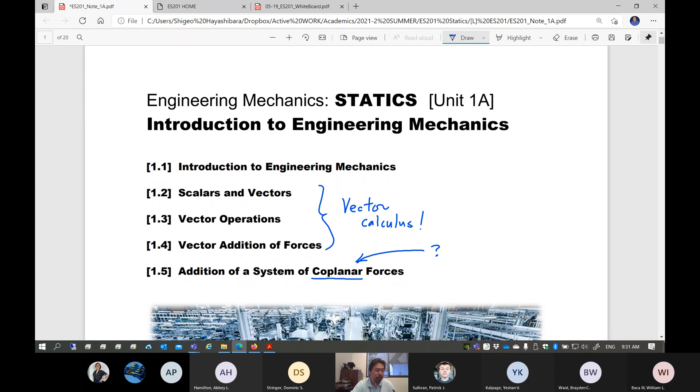Does anybody know the meaning of coplanar? Please speak up. Wrong answers welcome. What is it, coplanar? Is it a multiple plane?

Coplanar means on the same plane. On the same plane. That means coplanar is 2D. So if you say multiple planes, it's going to be 3D. So if you look at 3D, you have to do a very good sketch, of course.

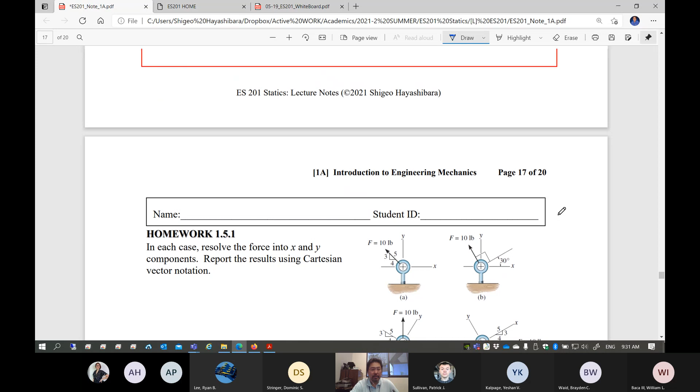Coplanar is... wait a minute, am I right? I don't know, let's find out. Let me just take a sneak preview. What is 1.5? Yeah, coplanar is 2D, looks like, yeah, everything's 2D. See that? Yeah, okay, so everything is in the xy plane. Ah, all right, good, good, good.

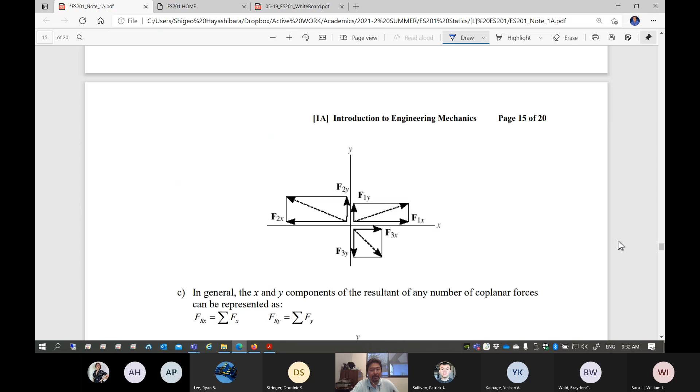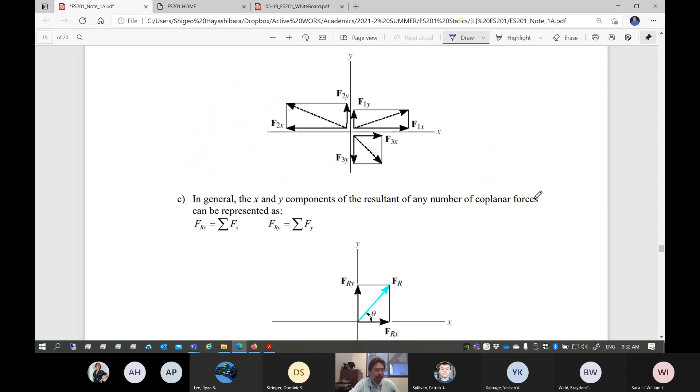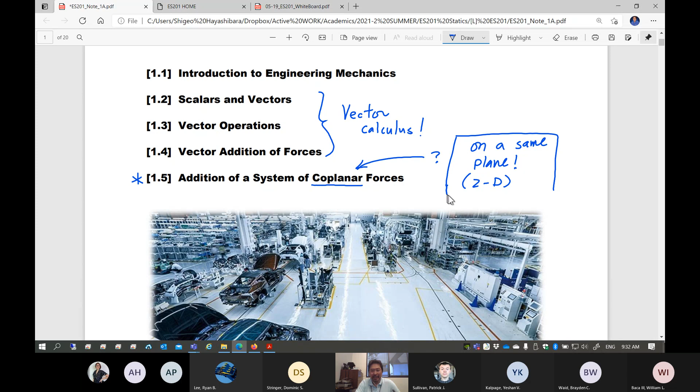So we are going to begin with two-dimensional vector subtraction, addition, combining two vectors, three vectors, finding out the resultant, or resolving one vector into two directional components, stuff like that. We're going to do that to begin with in 2D, and then we are going to extend it to 3D. So I was right, good. I appreciate your comment, wrong comments also appreciated.

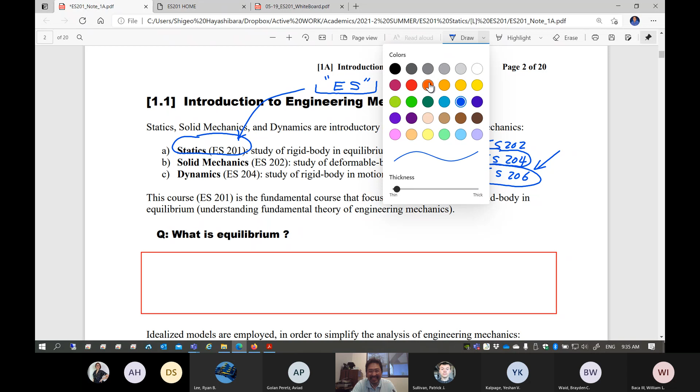This is solid mechanics. This is a very basic class for structures. Who's teaching structures? Dr. L, right? Yeah, I'm not gonna name. But anyways, those are tough classes.

In other words, how much time you are willing to spend for those basic classes will determine your future fate. People say, hey, those are gauntlets, you know, tough classes. No. Tough things come later. If you take care of those classes right, those tough classes will become all of a sudden your fun classes.

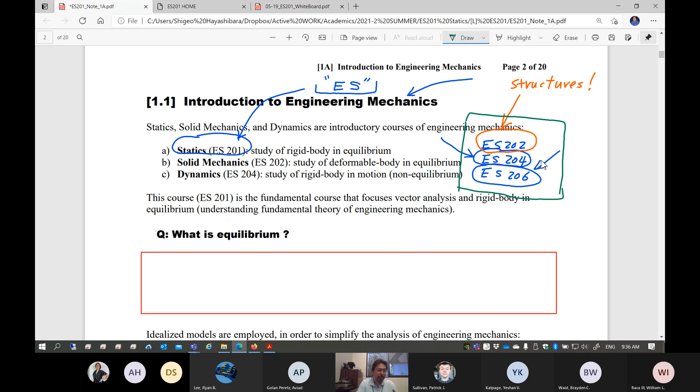You fully enjoy being an engineering major. Graduate, get a prestigious job, enjoy your life. I hope that's what you want. Okay, so don't listen to what the fake news said.

Well, fake news, I shouldn't say fake news, but the fake information that the students spread over. Oh, you know, don't take Dr. W's class, well, it's a nightmare class, take this teacher instead, he's easier - kind of information. That's BS, okay? If you say, well, Dr. W is so difficult, tough, and a nightmare class, that is a very good indication that you'll be educated very, very well.

Anyways, so this course ES201 is the beginning of those. Welcome to engineering core curriculum. But you have to go through it to get to your major classes, AEs. You can never get to that level unless you go through those engineering core majors, engineering science, engineering mechanics.

Actually, engineering science - ES is engineering science. What is engineering science? What is the difference between that and engineering mechanics? So this science terminology comes into play because this is physics of why this happens. So it depends heavily on physics, in other words, theoretical - you have to understand theory first before you understand mechanics.

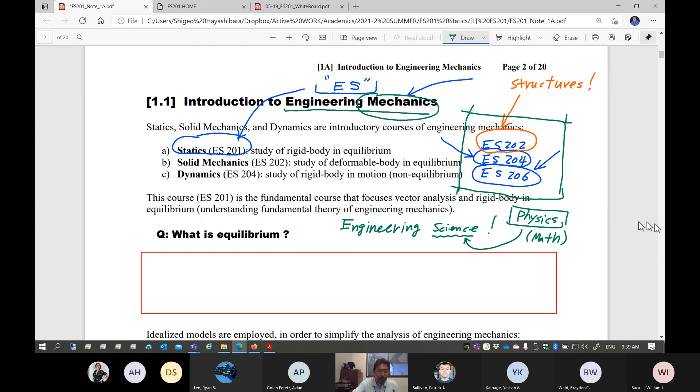So just don't think, oh, this is a class I can kind of sit back, relax, have a coffee and not pay attention, and I can go through it - no, you're going to spend 4 years with serious hard working. Try to understand the concept.

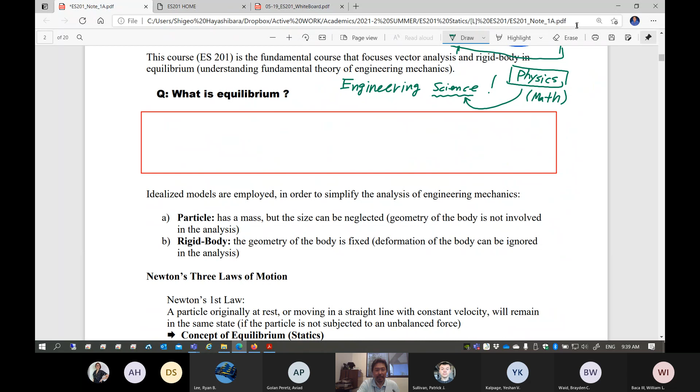Okay, so question here. Number one: statics is a fundamental course, focuses on vector analysis and rigid body in equilibrium - two very important terms. Let me underline. Vector analysis is fine, but rigid body, equilibrium - two important things. Rigid body, of course, you know that.

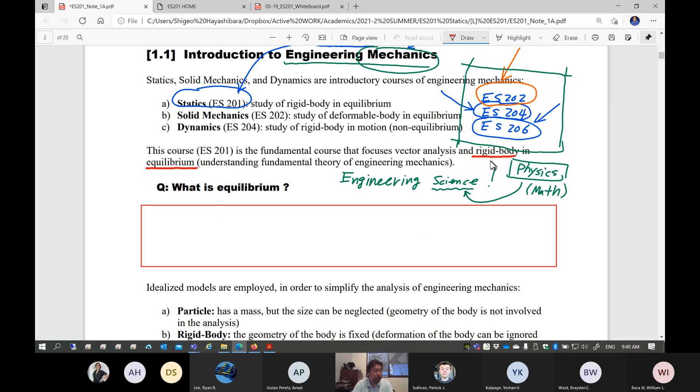Rigid body is a very hypothetical thing. It doesn't deform at all. No matter how high you apply the external force, this thing doesn't deform. That's rigid body - idealize the concept. We are going to deal only with rigid body in statics, okay? And equilibrium - what is equilibrium?

No acceleration is 70% correct, 30% wrong. In order to have acceleration, you have to have a motion. Equilibrium is... constant speed could also sometimes be considered equilibrium. So you're right, but in statics, as the name implies in this particular class, basically means no motion. If you have motion with a constant speed, if you choose a proper coordinate frame, you can consider that as an equilibrium too. But let's just for a moment say no motion.

What causes no motion? Suppose you're pushing something and moving it around - I have a mouse moving around, it's moving, I'm applying the force. What makes it no motion? When you have no force? No force is one thing, but suppose you apply one force - can you still, with one or more forces, create the no motion condition? Yes, if the net forces cancel, it's in equilibrium.

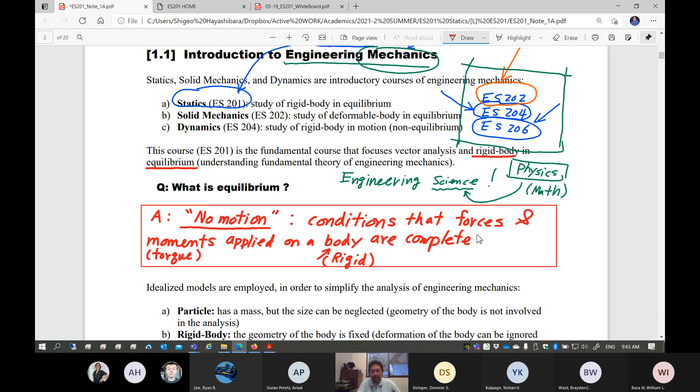Do you know moments? Sometimes called torque. Moments applied on a body - body is a rigid body. Condition that forces and moments applied on a body are completely balanced. As a result, there is no motion. This is called equilibrium. So statics in this class is all about a rigid body in equilibrium.

Okay, so that's the baseline concept. Now you're going to take solid mechanics after this - what is that class all about? I don't know who's teaching it, but you're going to take solid mechanics. What kind of class is that after this class? Ryan, go ahead - the study of deformable bodies. So deformable body, strict, yeah. Oh, so solid mechanics is basically about the same as statics. The only difference is the body is now deformable.

If you're dealing with a deformable body, what happens is when you apply the force, the body deforms. As a result, you're going to develop internal strain, and as a result, you're going to have internal stress also. You're going to deal with that. That's solid mechanics, but the starting point is statics.

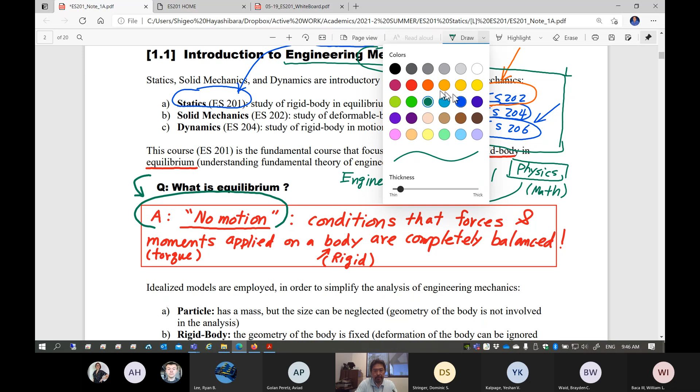Okay, dynamics - what is that all about? With motion? With motion, yes. So in dynamics, you are not going to talk about the deformation of a body - still a rigid body. However, if the rigid body is in motion, suppose you apply a force and the body starts moving, it could accelerate in a certain direction. What is the behavior of that? So those three are essentially the same category of engineering science courses - we just constrain one condition and then simplify and analyze. So as you go through those classes, you need to systematically understand what aspect of engineering science we are dealing with. Those are not independent classes.

Those are closely related. Now, here's something nobody will tell you to do, but I will tell you: after you take all three classes, you have to integrate, summarize, and have a big picture. In other words, small tiny pieces of the puzzle - you have to put them together yourself. People actually do that without consciously thinking about it, but that's what you need to be doing. Students sometimes struggle to do that. In upper division classes, sometimes students just cannot perform well in any engineering class they take - those are the students who actually cannot piece together those things into a big picture.

Statics comes in, dynamics comes in, and then thermodynamics comes. Those are not independent classes, they're closely tied together. You have to piece it together yourself. Nobody actually tells you that, but I have to tell you this is important. Oftentimes students don't realize it. After completing all of those core engineering science classes, you have to piece it together yourself. You can possibly create one big file folder with all of those classes, homeworks, and notes combined, and tab it so you can pick up any information you need for upper division classes. Piece it together, because this is systematically an engineering science class. You need that for your major classes. Without that foundation, it's a joke when you take AE classes in upper division.

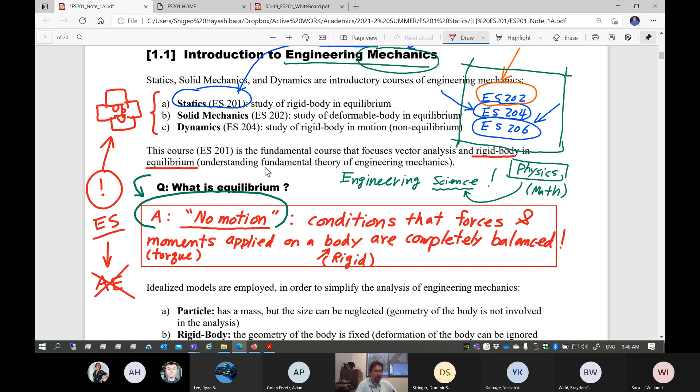Now in this statics class, we are going to use idealized models. We have to idealize because we're dealing with a rigid body. The very first step of idealization is to consider a particle. What is a particle? Nobody knows - it's idealized as a particle. This has mass, but the size can be completely ignored. It's small enough that I don't care about the size. The geometry of the body is not involved. So first of all, idealize the concept.

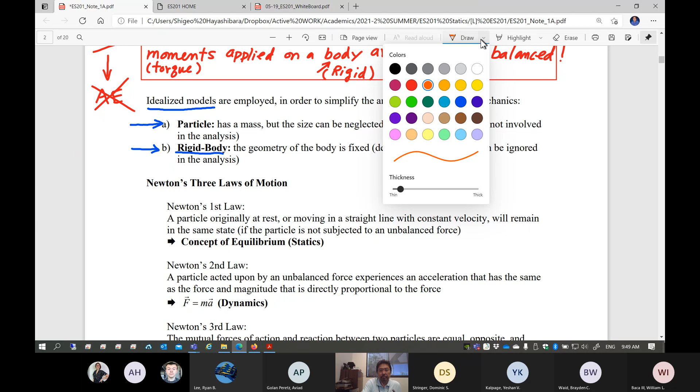Gradually we are going to move into rigid body, which is some actual body - it could be a car body, an airplane body, or whatever - but we still consider it a rigid body that doesn't deform at all. So we deal with two different kinds of idealized things. Suppose you're talking about a particle - this is a very small, tiny thing, a particle.

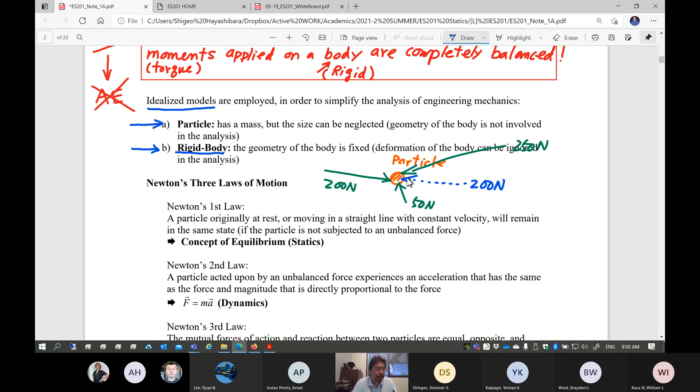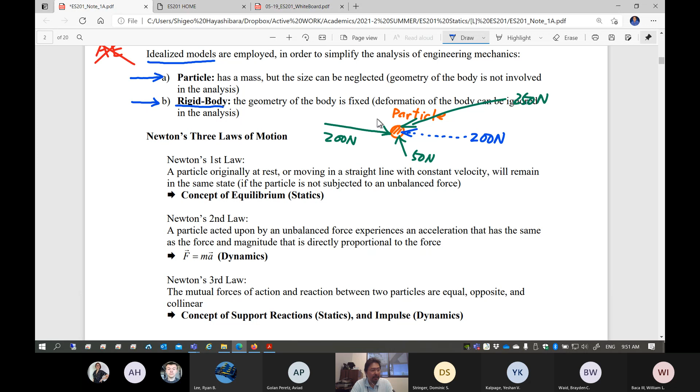Let's apply forces. I'm going to apply 200 Newtons of force here, and 50 Newtons of force here, and 250 Newtons, I don't know. Hopefully those two combined together equal and opposite to 200 Newtons. If so, it's equilibrium. I have no idea what the angle is, but this 250 combined is equivalent to 200 Newtons, equal and opposite to the original 200 Newtons. If so, this particle is in equilibrium because there's no motion involved. So the question becomes: what is the angle here? What is the angle there? That is going to be a starting problem for the statics class.

Before we begin, let's talk about the very famous Newton's three laws of motion. This is Newton's first law: a particle originally at rest, or moving in a straight line with constant velocity, will remain in the same state if the particle is not subjected to an unbalanced force. What does that mean? This is equilibrium.

Newton's second law: a particle acted upon by an unbalanced force experiences an acceleration that has the same direction as the force, and magnitude directly proportional to the force. F equals ma. By the way, this is the governing equation of ES204 dynamics. This is the concept of this class, ES201 statics.

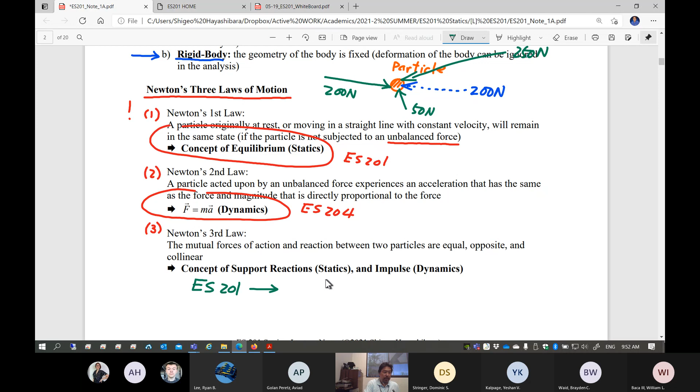Newton's third law of motion: the mutual forces of action and reaction between two particles are equal, opposite, and collinear. This is actually very important in this class, ES201. We are going to later revisit this concept. This is basically the baseline concept of support reactions.

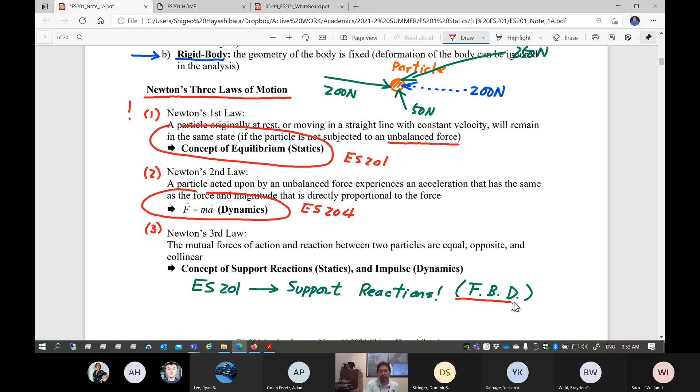Free body diagram is a very important item in statics and also solid mechanics. Almost every problem you solve requires a free body diagram. Let's say, for example, this is a bar or something. You are going to support it - this is a pin support, sometimes called that - and the other side, you put a roller on the ground. Let's analyze this.

What is the first step you need to do? You have to draw a free body diagram. We are going to cover that later, don't worry too much about it. You are going to basically disassemble everything: remove the pin, remove the roller, and then replace them with equivalent support reaction forces.

So those are the two support reaction forces for the pin. This is a single support reaction force replacing this roller. This is the free body diagram. After you sketch out the free body diagram, you apply equations to try to solve it. So if you apply a 500-pound force here, what is the force reacted here?

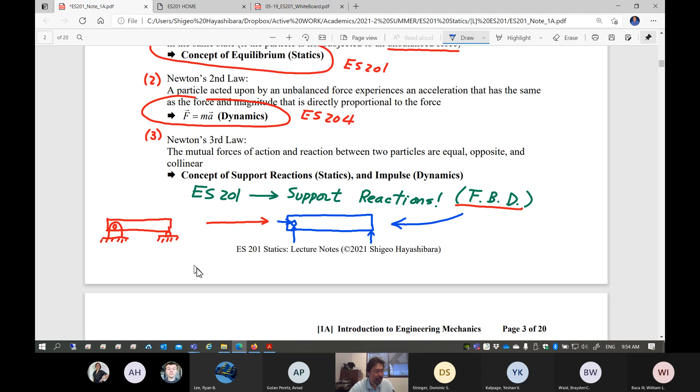Stuff like that, okay. Any questions so far? Please stop me anytime if you have any question.

All right, next page: Newton's law of gravitational attraction. This is based on the second law, because force is essentially created due to mass times acceleration. Now this acceleration becomes gravity. So this is entirely based on Newton's second law of motion. This actually provides the important information of how much gravitational acceleration you're going to develop on the surface of a planet.

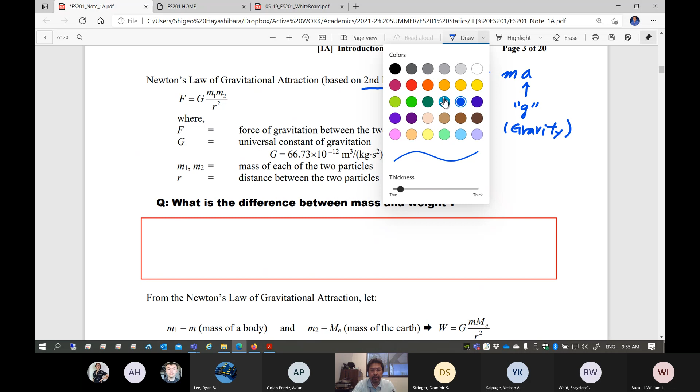So, by the way, do you guys know the gravitational acceleration at standard sea level on Earth? G, anybody? Is it about 9.1 meters per second squared? 9.81, sorry. 9.81, that's right. What's the unit? Meters per second squared. That's correct.

Anybody know the British unit, the U.S. customary unit? People understand you love SI units, but this is the United States. What is the U.S. customary unit? I think it's about 32.2 feet per second squared. Okay, feet per second squared. So this is the standard sea level gravitational acceleration on Earth: this is SI unit, this is US customary unit, British engineering.

So it looks like you have two different unit systems, huh? Yeah, too bad. I'm originally from Japan, you know. After I came to the United States, it was my first time looking at what a pound is. I'd never heard of it. Why 12 inches and not one foot? Stuff like that. But we're going to cover that.

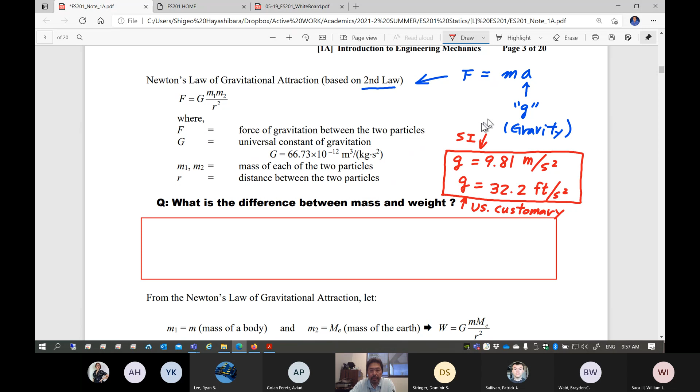This is a force of gravitation between two particles. Suppose you're talking about the weight of something, W, this is a weight. So let's pick up this mouse. This mouse has a weight, I don't know how many pounds, but how can you determine such a thing? How much mass do you have for this mouse? Multiply by G, gravity. This equation comes entirely from here. So suppose you have two things: one is weight, one is mass. Are those the same thing or different things?

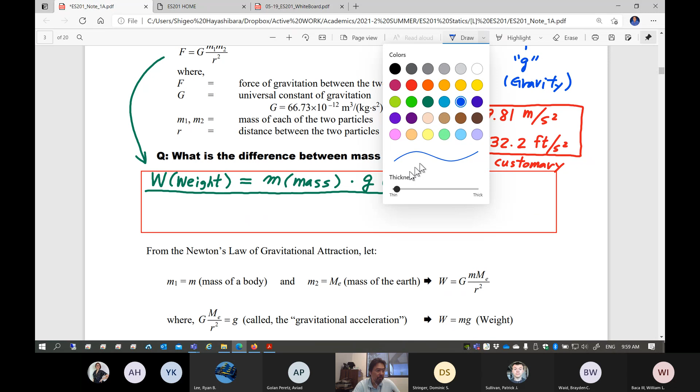Of course, it seems different. What is the difference, okay? This is actually quite an important discussion. This is a joke, so please don't do this, but suppose you go shopping today, I don't know where, could be Walmart, could be somewhere else. Go there and buy something, let's say you buy a bag of apples, and the bag says 5 pounds.

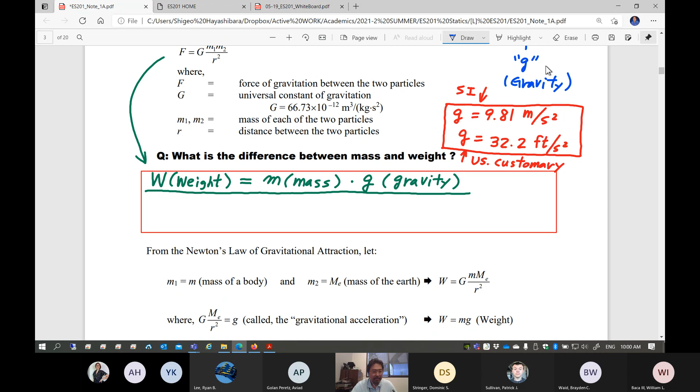Okay, then bring that 5-pound apple bag, go straight to the customer service, ask this question: is this 5-pound mass, or is this 5 pounds of force? This is a joke, don't do that. What's your response? Suppose you have a part-time job at customer service, and a Japanese professor from Embry-Riddle shows up and asks, hey, is this a 5-pound mass or 5-pound force? I want to answer, how do you respond?

Well, mass can't be a force, right? So if you say 5 pounds of force, that doesn't make sense to me, because pounds is... well, actually, no, that does kind of make sense because that's a weight. Good, so you're saying this is 5-pound mass, huh? If I say that's 5-pound mass, it doesn't make sense at all. Okay, so this is 5-pound force, huh? If I say it, then, right, you're a customer service rep and you say yep. Then I say, fine, I'm going to pay the money for this based on your statement that this is 5-pound force, is that correct? And you say yep. Go ahead, you're crazy, then you're right. So is 5-pound mass different from 5-pound force?

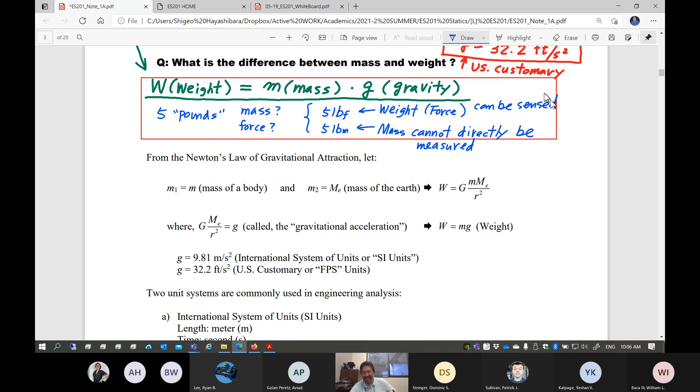That happens to be 5 pounds of force. Under the Earth's gravity, this apple has 5 pounds of mass. So you actually backtrack and detect how much mass you have under the influence of standard gravity. If you go to the moon and create a Walmart there, you have to redesign everything for that scale.

Or actually, you always have to deal with, okay, how much pound mass do you have here? Is this pound mass or pound force you're talking about? Because those are not the same thing on the moon. Why is that? Because the moon's gravity is not this value. So the same 5-pound mass on the moon is not going to create 5-pound force of weight.

How much do you think it's going to create? Probably less, because you're multiplying by a smaller gravity. That's right. Gravity of the moon is 1/6 of Earth's.

So suppose if you have a 6-pound mass huge apple. Drop it on the scale on the moon. It only shows 1 pound force on the moon. If you bring it back to Earth, it shows 6-pound force because it's 6-pound mass. Dropped on the scale, 6-pound force. But on the moon, it only shows 1 pound force.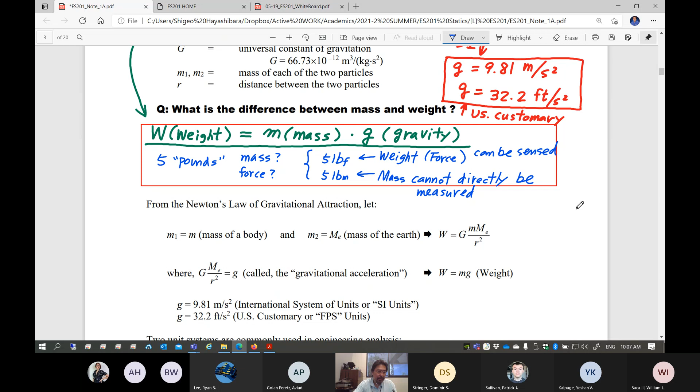Okay, so I hope you get the basic idea for that. Weight and mass are different, okay? So, that's right. From Newton's law of gravitational attraction, you're going to apply two different masses. One is the mass of a body, the other one is mass of the Earth. Apply this equation, and it's going to create the equation of weight on Earth.

Equation of weight: weight is equal to mass times gravity. Gravity in standard unit on Earth is given at standard sea level. I just keep saying sea level. What do you mean by that? If you go to higher altitude, this is going to change. So in a space shuttle, at really high altitude, it doesn't have this much gravity.

So how many people here are actually space track, astro track? Raise your hand. So, too bad, you have to deal with this all the time, okay? So mass is not equal to weight if you go to space because the gravity is not this value.

So if you go to Walmart and do such a trick, oh, okay, this is 5-pound mass or 5-pound force, which one is it? And then people say, well, I don't care, you can take either way, because this is on Earth at standard sea level, the values are the same. 5-pound mass of an apple creates 5-pound force of weight. So you can either take pound mass or pound force. But if you do such a thing when you design a spacecraft, what happens? You can tell, right?

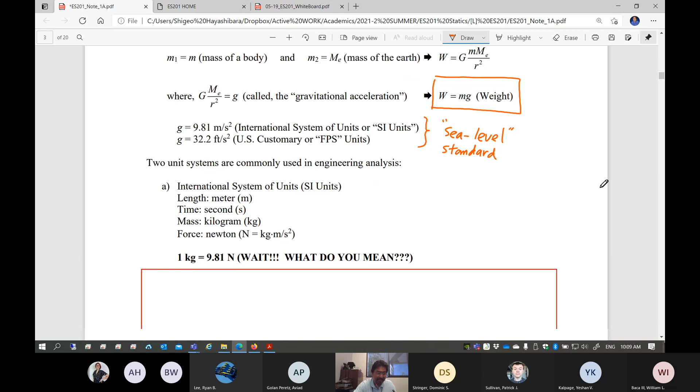Okay, so let's be careful, especially if you call yourself astro track. Differentiate pound mass and pound force.

Oh, that's why I hate US customary units. I love SI units. Do you say that? Does anybody say, oh, I love US customary unit, it's better than SI, or SI is so good? If you love SI, raise your hand. Two, three people, 4, 5, 6 people, seven people, 7 out of 9 people love SI. Okay, actually 8.

So yeah, I can hear your feeling. There are 2 unit systems we have to cover here: SI and then US customary. This is something called British Engineering Unit, BE. This is like System International, something. This is a French word, okay, International System of Units, SI. Let's begin with it, okay.

So we are going to actually talk about three base units. I'm going to use the term dimension. If you come to think about anything you use in engineering, what kind of things we're going to use to quantify, such as velocity, acceleration, weight, force, lots of things, those essentially come down to 3 base dimensions: mass, length, and time. So those are the three base dimensions.

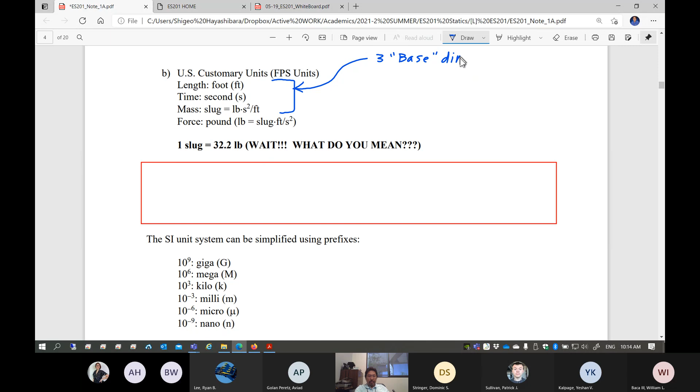Three base dimensions: mass and length and time. Let's for a moment just forget about the temperature. So suppose if you choose a standard dimension of unit of mass—actually, let's just do that later. Let's just choose an easy one to begin with: let's just choose the standard unit you appoint for US customary units for time.

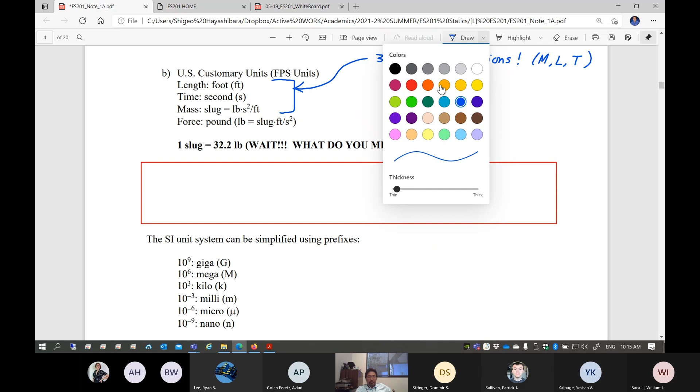What is the standard unit of time? Standard—it's a second. People don't use minutes or hours or 1 week as a standard unit.

In other words, standard in terms of: I'm going to analyze an engineering problem. The problem is given in terms of minutes, let's say shaft rotation, revolution per minute. Can I pick up a value associated with that unit, 60 RPM? Can I just pick up that value and punch it into my calculator together with other values? Suppose if you try to determine how much torque do I have—the problem is given, okay, shaft diameter is 2 feet, I don't know, and rotation is 60 RPM. How much torque do you need to have, or how much torque do you develop in, I don't know, pound foot? So all of those numbers are associated with those different units.

What is the standard unit you want to have for that computation? It's a second. So if the RPM is given, what do you need to be doing? RPM is not the standard unit. You have to convert it to revolution per second, not the minute. So the original number could be 60, but it's going to be a different number. That different number, you need to get first, then use that number in your calculator. Do you understand what I'm talking about? That's the standard unit—an important concept in your computation.

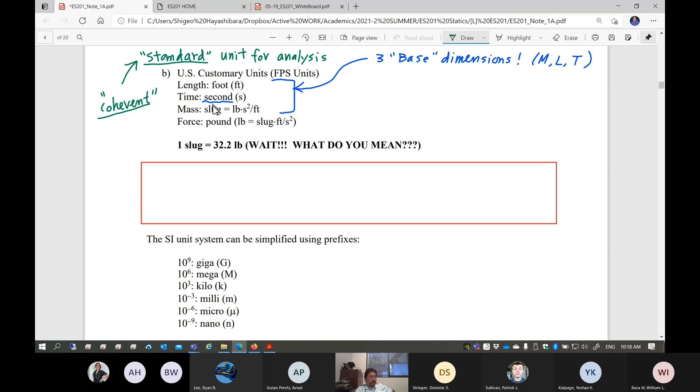coherent unit. Coherent means if you stick with seconds for the time standard unit, it sticks with other standard units nicely so you can create a product such as force. Force is made up, like I said, force unit as a standard, 1 pound of force, is combined with those other units. In order to create the standard unit of force, you have to stick with those other standard units of mass and length time. So let's begin with the easy one.

What is the standard unit of time? It's a second. And now this is something you really hate in US customary unit.

What is the standard unit of length? Anybody? The foot. Do you like that? That's your standard unit - feet, like FT. Yeah, this is a standard unit. And it seems too big. Lots of people, especially in machine shop, don't like this unit because it seems too big to represent certain things. So people use something else. I'm going to switch to the red font.

So people use this unit instead of foot almost all the time, especially in machine shop. What is that unit? People like that unit so much that oftentimes they say, oh, this is the standard unit, what are you talking about? What is that unit? You use this all - inches. Now I'm using red font with a question mark on inches because inches are quite often used almost as if this is the standard unit of length.

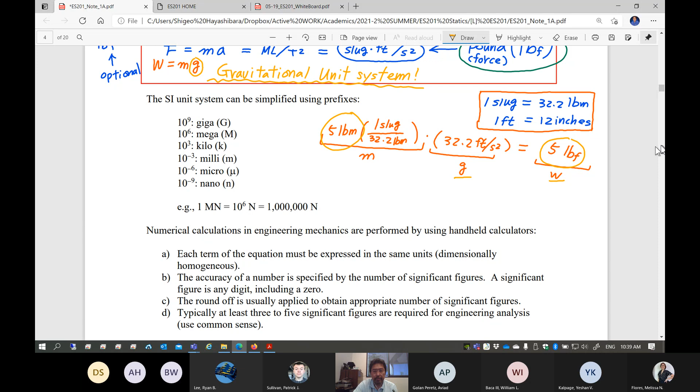Okay, this is a very, very important concept. Do not mix up pound mass and pound force in any engineering class. People still do that, and as long as I teach engineering, I'm not going to allow you to mix up pound mass and pound force. If you use pound mass, the subscript is always required. If you use pound force, it's optional. One is standard use of pounds, one is non-standard.

And inches seems like a standard unit, but don't use inches in your calculation. You always use feet in your calculation.

Somebody said something. Go ahead, please. Did you have a question or something? I think I heard somebody say something. No, my mic just went off. Sorry. Oh, it's okay, no problem.

So I hope this is understandable for you. Very, very important concept. Please raise your hand if it makes sense. Good, good, good, appreciate that.

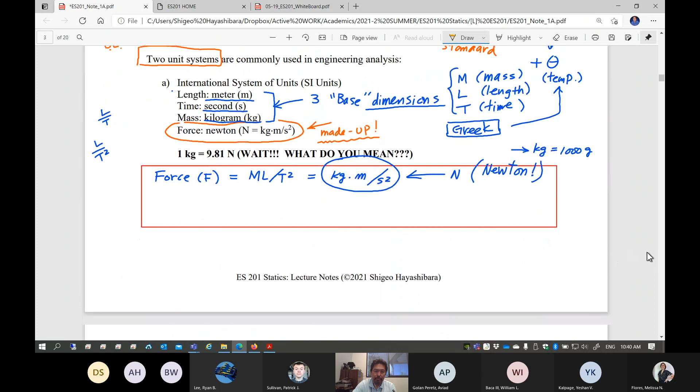Okay everybody, that's great. So this is something like you have to be extra cautious when you use a U.S. standard unit system. However, let me tell you something, I'm from an SI unit country. Do you think SI is such a super nice unit that you always want to stick with? No. The hell no, SI unit is also very confusing.

You can try this one simple thing to find out how confusing SI unit could be. You go to a fish market and try to buy a fish in an SI unit country, let's say Japan. You go to the fish market, try to buy fish. It's easy? No, it's not easy. Because you say the weight, or force is a weight.

The standard unit of force is Newton, right? So try this: you go to the fish market and grab someone, a fisherman or somebody, saying, hey, can I have 2 newtons of fish, please? May not necessarily be in English, you can use a foreign language and say, can I have 2 newtons of fish, please? Then that person says, what again? 2 newtons, what the hell is Newton? I've never heard of it. Never use it here.

Okay, let's say you pick up a health meter scale. You want to measure your weight this morning. Turn it on to SI unit mode. What is the unit that comes up? Newton? Oh, this morning I have 700 newtons. Huh? It's kilogram. Kilograms. People use kilograms for the meaning of weight. What is that? Kilogram force.

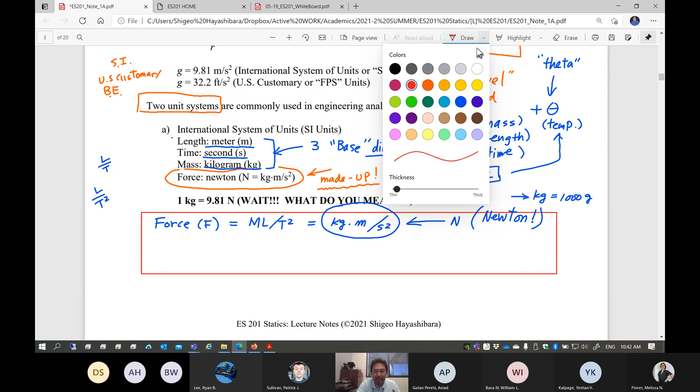Let me just use a red marker. Mass or force? So oftentimes people use kilogram meaning force. kgf, this is called kilogram force. People use that always, casually use it.

Now engineers, aerospace engineers in France, SNECMA, they use thrust of an engine, like 5,000 kilograms of thrust. What the hell, what are you talking about? It's engine thrust, isn't it? Yeah, 5,000 kilograms. Huh? Kilogram force, this is always used. Very confusing, okay? So once again, you have a unit conversion of a kilogram force right here.

So once you see that, 1 kgf is equal to 9.81 Newton, you have to convert it. So this is a unit conversion. Whenever you see people use kilogram indicating a kilogram of weight, you have to convert it to Newton, because Newton, although nobody uses it, is the standard unit. Engineers, you are the only one using Newton, but who cares, you have to use Newtons. You cannot use kilogram force just like everybody else outside of the engineering classroom. You are an engineer, you have to differentiate yourself from the rest of the world.

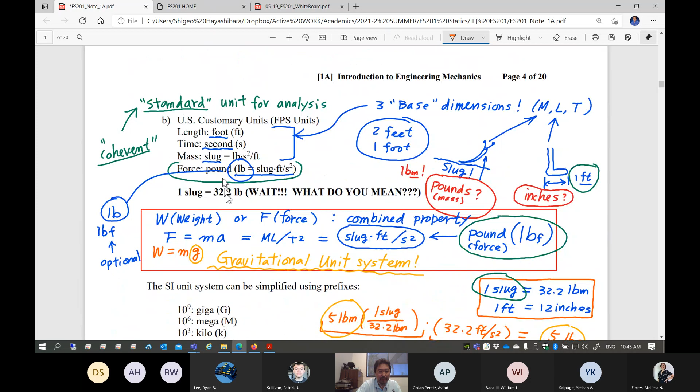Okay? This is a standard. Okay? Why is that? It's the same reason, okay? So, same reason. Remember, 5-pound mass of an apple equals 5-pound force under the standard gravity of Earth.

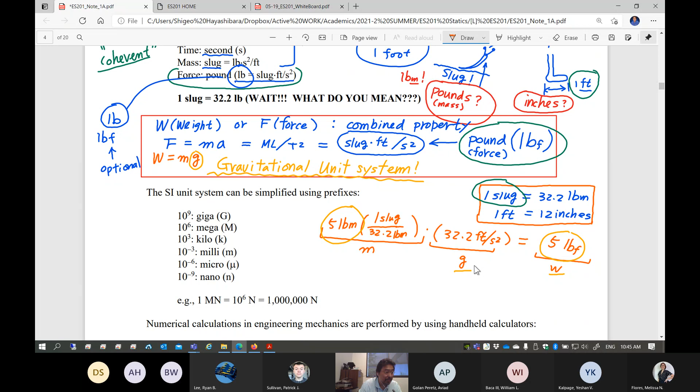It's the same meaning. So if you go to a fish market you can argue with a fisherman saying, oh, you say 2 kilograms of fish, is it kilogram force or kilogram mass? Which one is it, huh? Kilogram is a kilogram. Well, no, I want to know, 2 kilogram mass you're talking about, or 2 kilogram force you're talking about?

Which one is it? Kilograms are kilograms. What are you talking about? Okay, well, I'll take it as kilogram force. How's that? Sure, fine, take it. So you say, okay, I took it as 2 kilogram force.

2 kgf. Then you quickly realize, wait a minute, this is not a standard unit. I have to convert it to the standard unit, Newton. So 1 kgf is 9.81 Newton. Let's multiply this with the standard gravity, 9.81 meter per second squared. So this is the mass in Newton, and this is acceleration or gravity in meter per second squared.

Actually, no, wait, what am I talking about? This is force, isn't it? Sorry about that, forget what I just said. Let's just do an easy route. Okay, so you keep arguing.

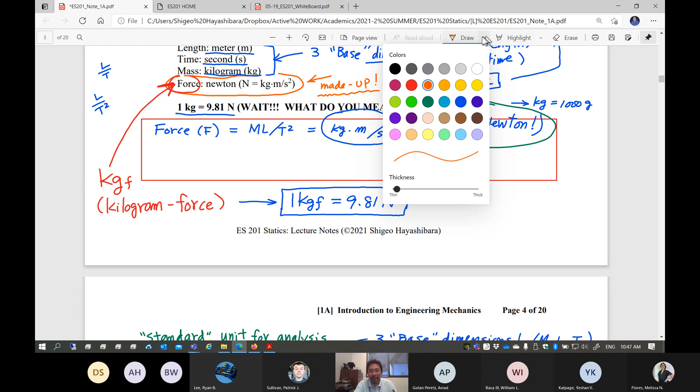Okay, so is this 2 kilogram force or 2 kilogram mass? Which one is it? I want to know. Can I take it as 2 kilogram mass? Then you say, well sure, fine, go ahead, do it, you're crazy. Okay, well I take it as 2 kilogram mass of fish. 2 kilogram mass of fish.

All right, this is a mass, 2 kilogram. Oh, kilogram is a standard unit of mass, I can use it as is. Okay, let's multiply it with 9.81 meter per second squared of gravity, because this is on Earth. This is going to give you the weight.

So this is, oh my goodness, I need a calculator. Okay, 2 times 9.81, it's 19.62. What's the unit? Anybody? In Newton, this is Newton.

Oh okay, so you're talking about 19.62 newtons of fish. What's Newton anyways? Okay, well let me convert it. 19.62 Newton, let's convert it to kilogram force, because 1 kilogram force is 9.81 Newton. How much kilogram force do you have? Anybody? Two, 2 kilogram force.

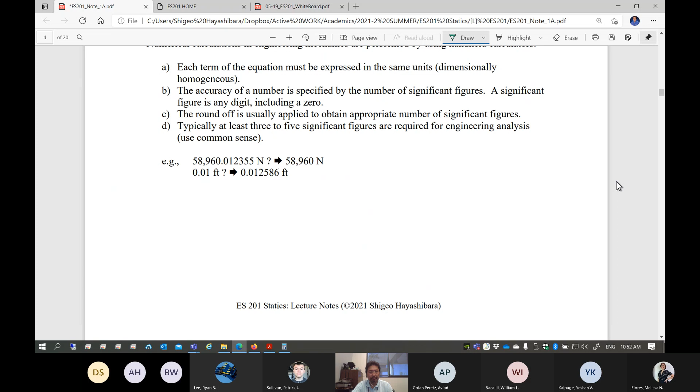Do you have any question? What was it on? I think it is on page 3, the L over T and L over T squared, what are those again?

Okay, so this is velocity, yeah, velocity is like meter per second, so this is length over time. So this is acceleration. Gotcha. Thank you. Yeah, you're welcome, I appreciate that question.